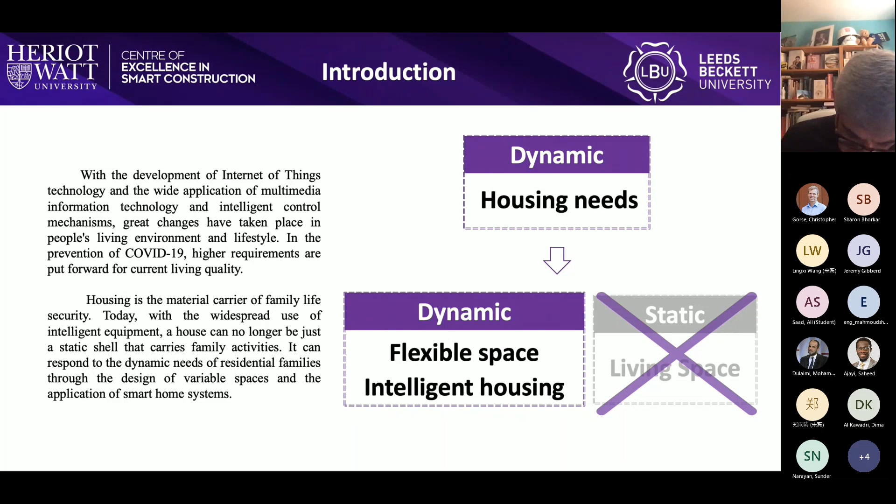With the development of Internet of Things technology, great changes have taken place in people's living environment, and higher requirements are put forward for current living quality. The house can no longer be just a static shell that carries family activities.

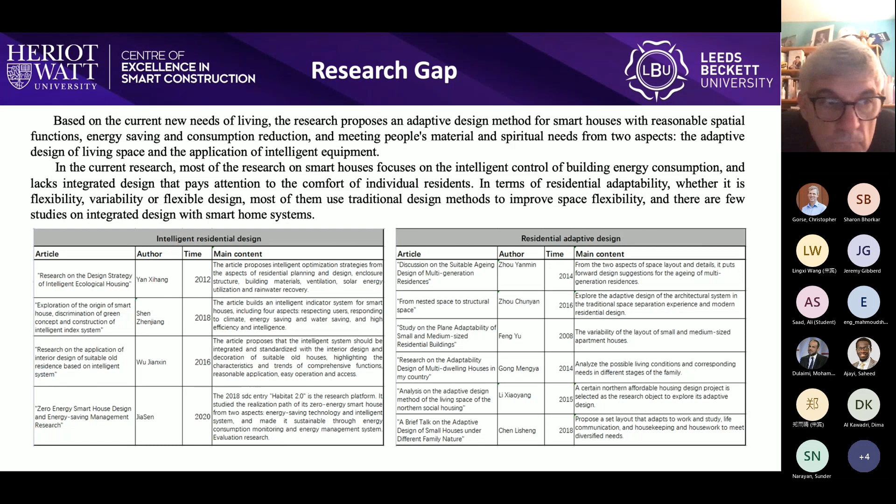In the existing research, there is a lack of research on the adaptive integrated design of smart houses that focuses on the needs of family living. This is the definition of smart house and residence adaptability used in this article.

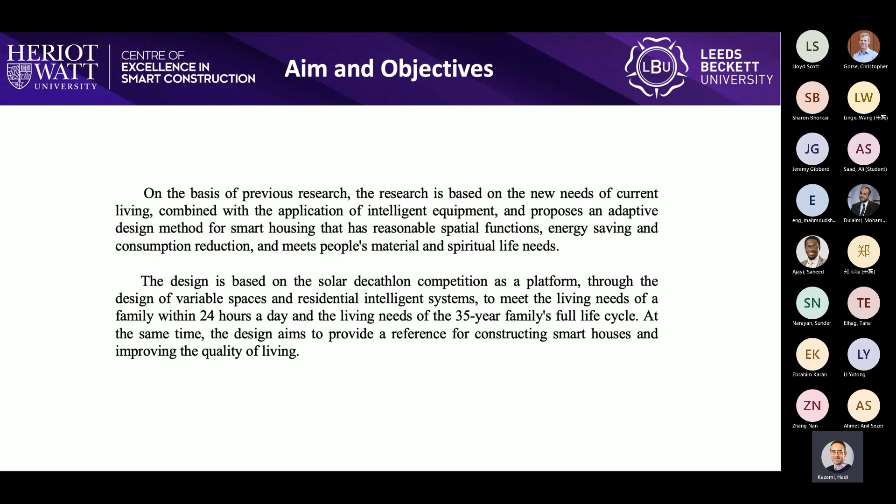I hope to propose adaptive design strategies for smart houses through research and provide a reference for improving the quality of living.

Based on the current social background, the research applies the methods of literature research, actual research, and product research to establish a correlation system among living space, living demand, and the smart home system. Then, through program design and practice, the study proposes the adaptive design strategy of smart houses from two aspects: space adaptive design and smart home scene setting.

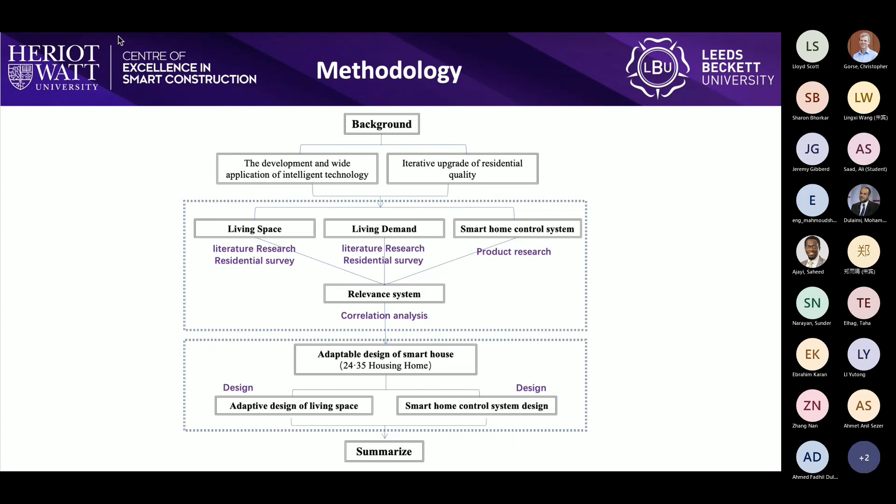The variable design of the living space can help cope with changes in the family's structure, and with the help of the smart home system, it can better meet current living needs.

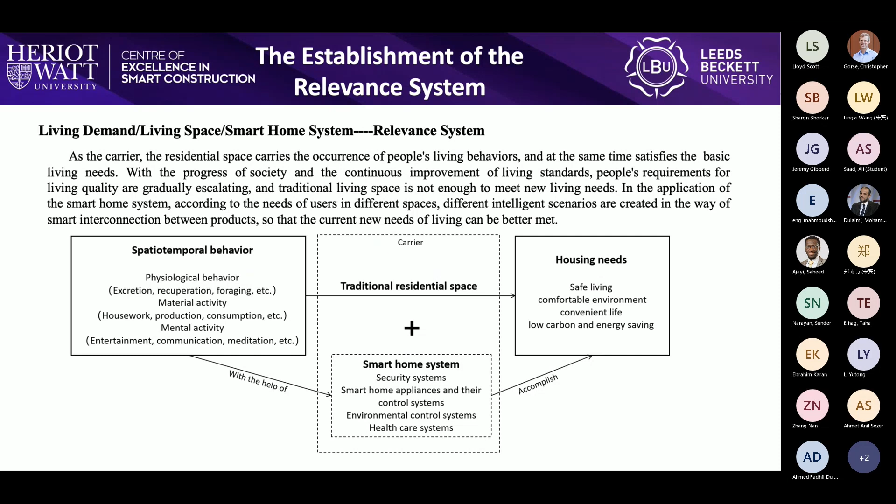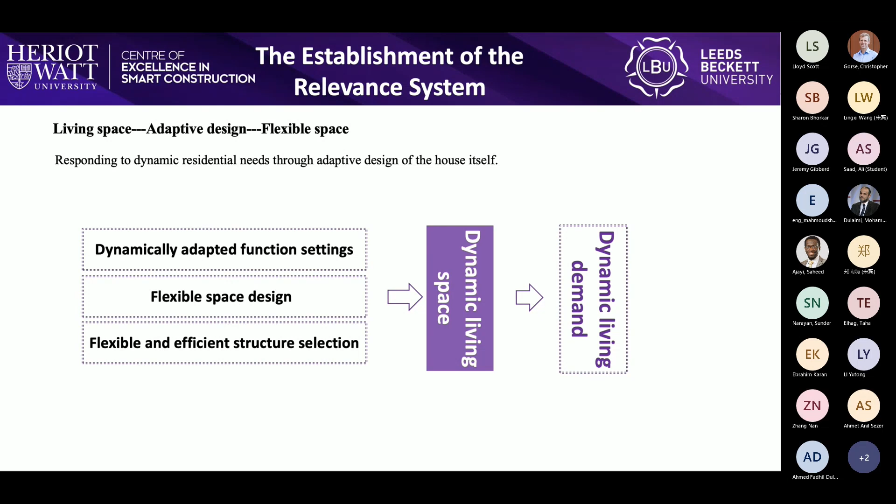Through research, the current smart home system can be divided into four categories: security system, smart home appliance and its control system, environmental control system, and health care system.

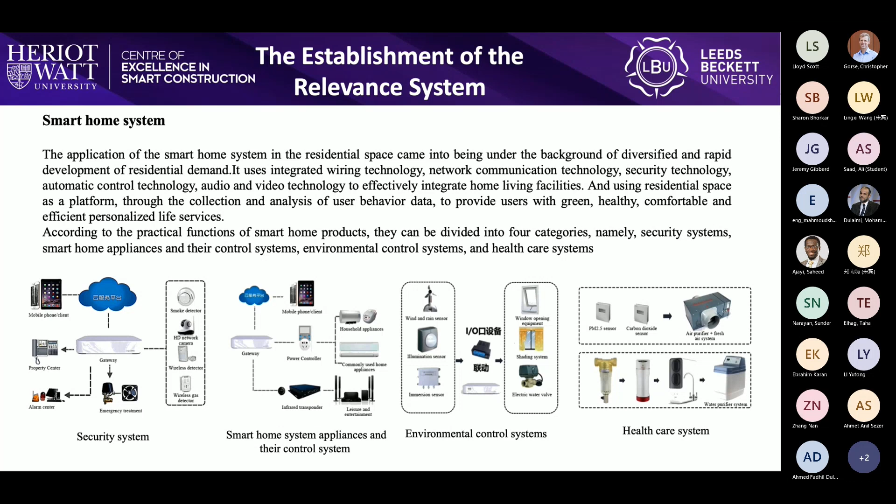The research simulates the residents' living behavior throughout the day and creates a smart life scenario. For example, the smart speaker wakes up the user on time in the morning and turns on the wake-up mode at the same time. A series of smart devices cooperate with people's 24-hour home life.

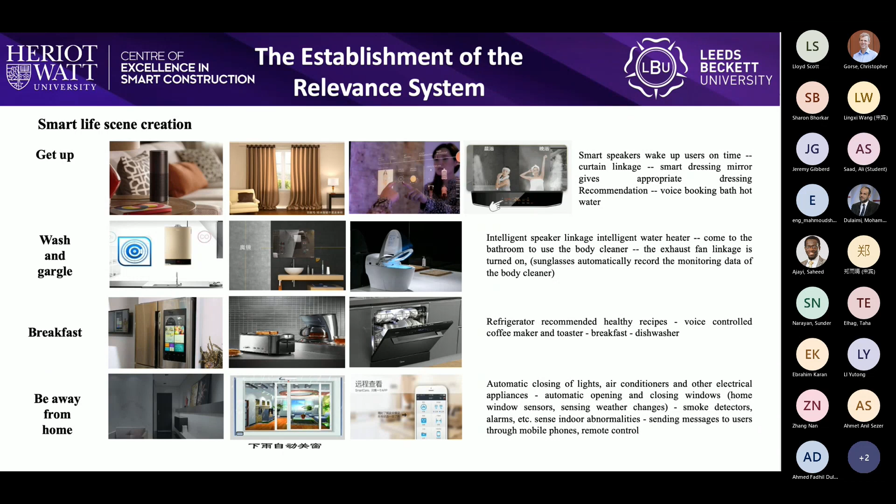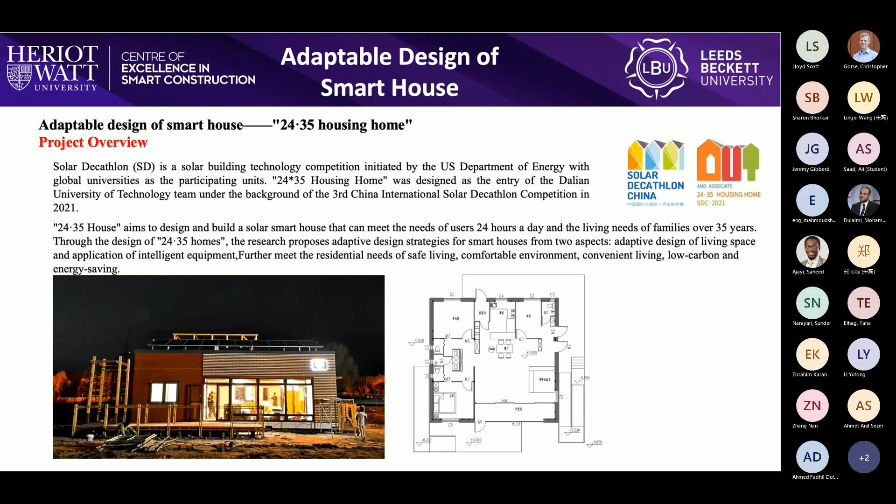The 24·35 housing home was designed and completed in the context of the third China International Solar Decathlon competition in 2021, which aims to design and build a solar smart house that can meet the needs of users 24 hours a day and the living needs of households with a life cycle of more than 35 years.

In response to dynamic residential needs, the plan responds from three aspects: dynamically adapted function settings, flexible space design, and flexible and efficient structure selection.

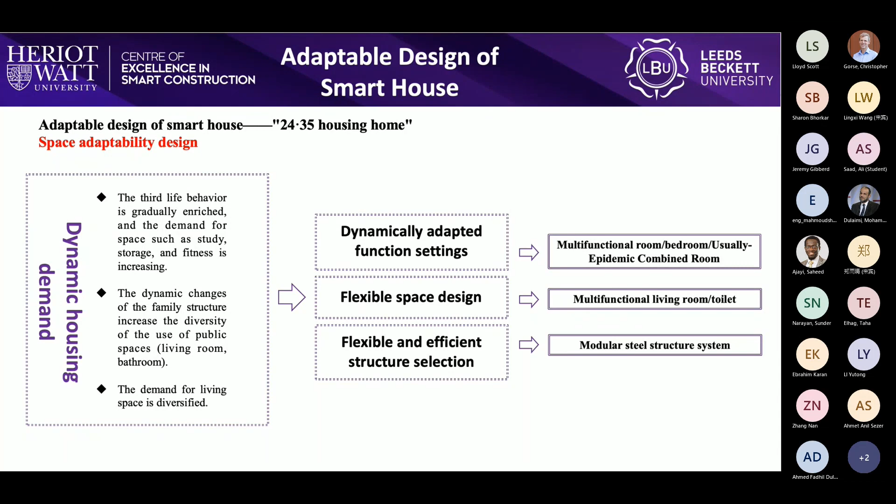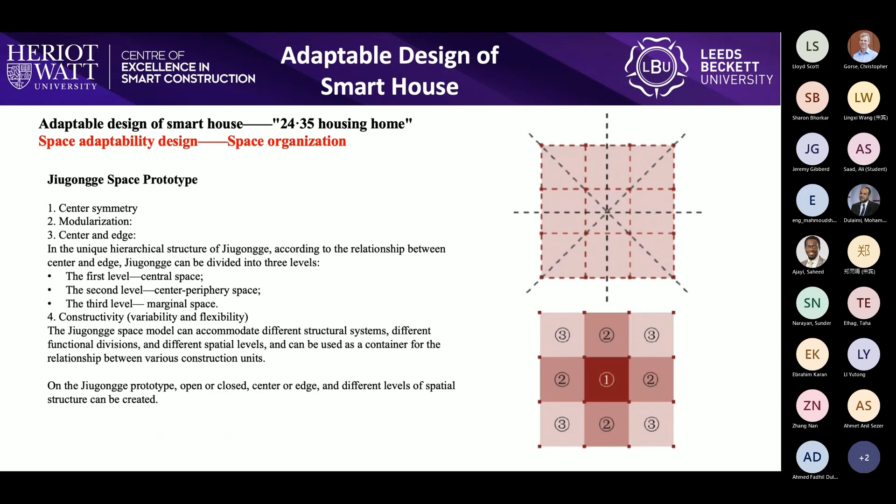First of all, in terms of space organization, the plan selects a highly adaptable nine-grid space prototype. In the design, the bedroom and the multifunctional room have the same scale and are arranged in mirror images, which can be flexibly changed and used according to changes in the family population.

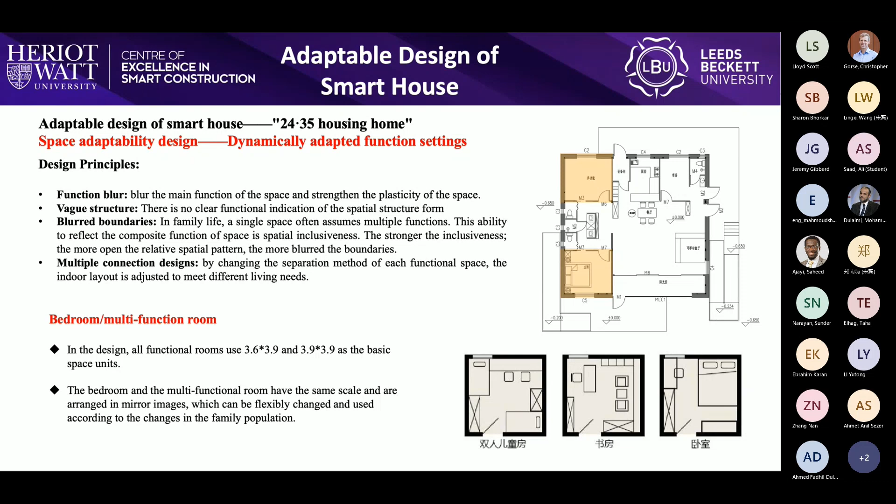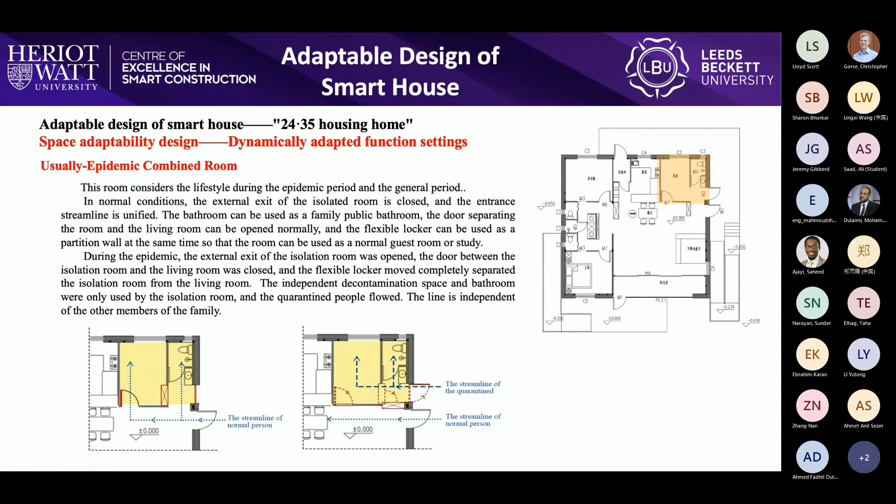With the help of flexible partition in the epidemic combined room, the lifestyle in both the epidemic period and the general period is considered. This is the design of flexible partition.

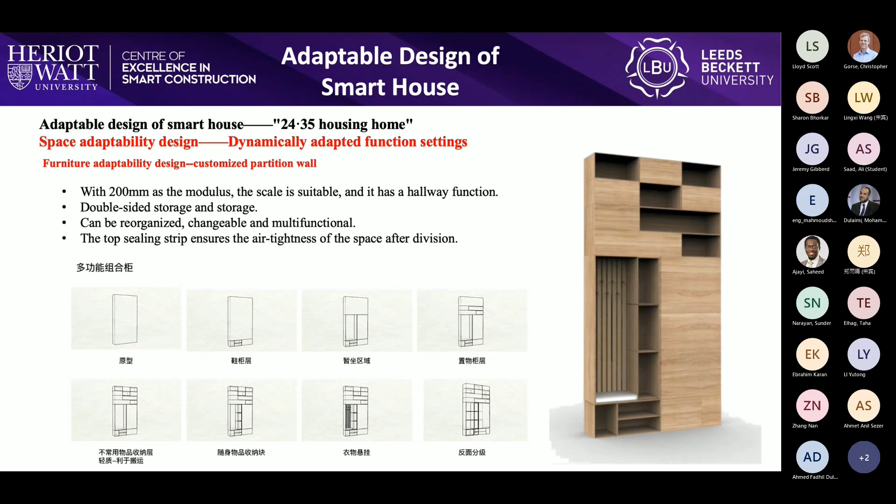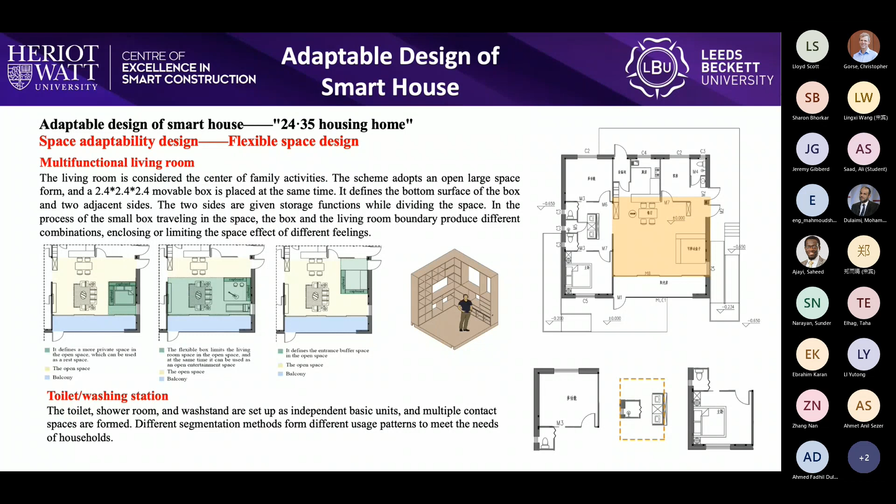The design uses a modular dual structure system.

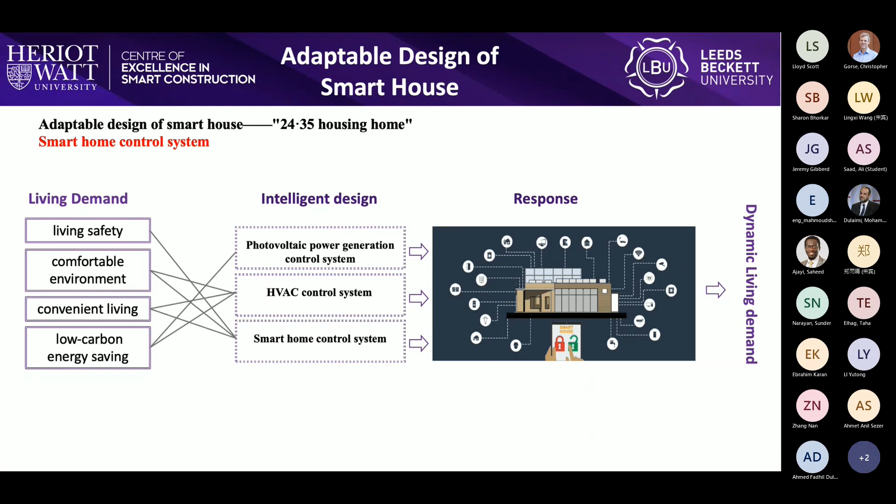In terms of smart home control system, the scheme has designed a photovoltaic power generation control system, an HVAC control system, and a smart home control system. This is a full part of the photovoltaic power generation system.

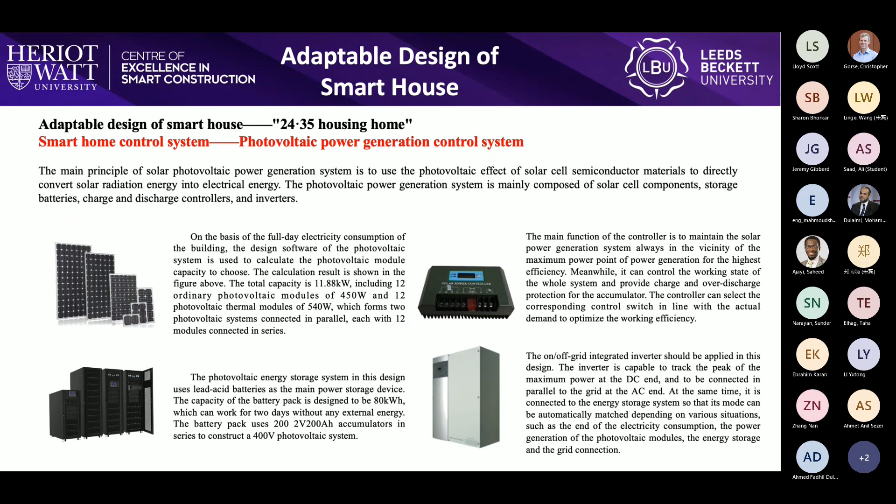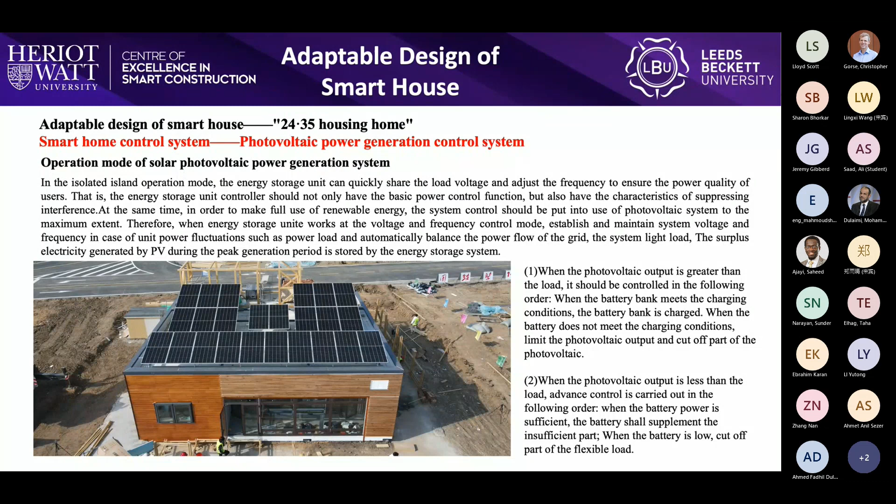Through the design of the system, the house puts the photovoltaic system into use to the maximum extent. The system automatically controls the electricity consumption of the house.

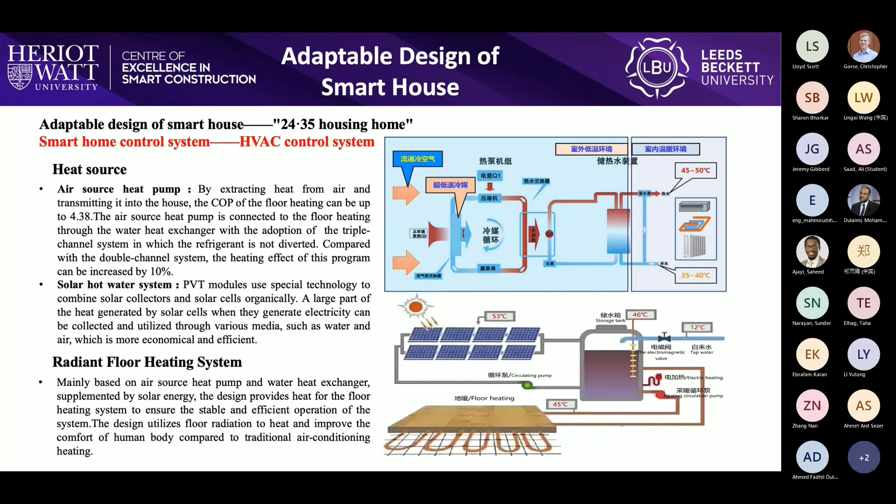In the HVAC control system, air and solar energy are used as heat sources to provide heat for the radiant floor heating system, which is economical and efficient, and at the same time improves comfort for the human body. The plan also applies an intelligently controlled air conditioning system and fresh air system.

The solution is based on the relevant system and creates smart life features such as smart sleep, smart access control, smart security, smart lighting, and so on.

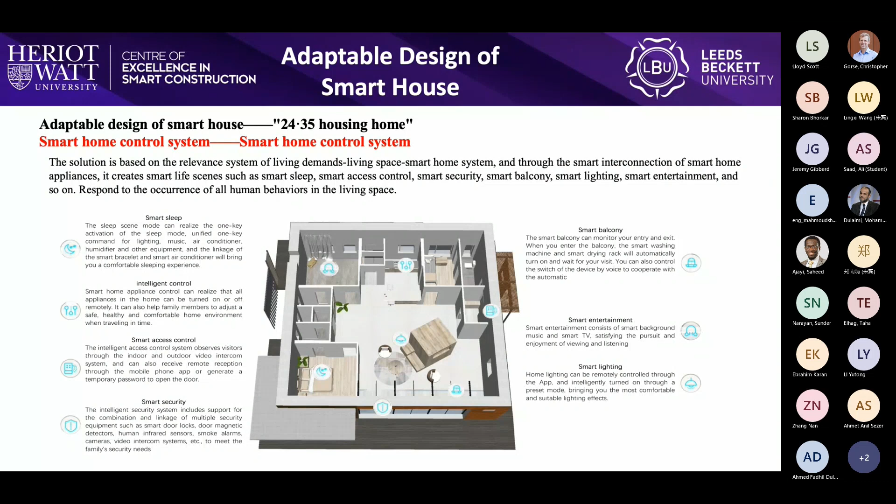The research analyzes the realization path of the adaptive design of smart house. The design improves adaptability of living space from the three aspects of structure, space, and function setting.

The application of the smart home control system ensures the safety of living and improves the convenience of life. The application of HVAC control system realizes environmental control centered on user comfort. The application of the photovoltaic power generation control system has realized low carbon and energy-saving residential needs.

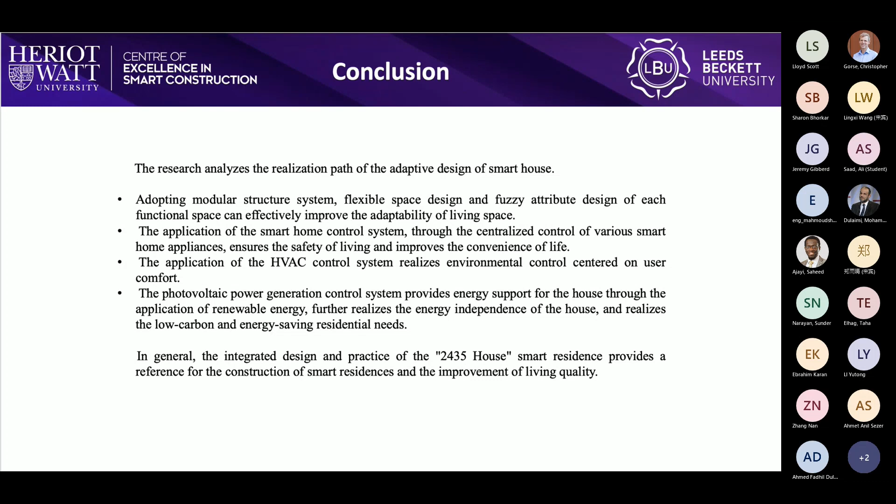In general, the integrated design and practice of the 2435 house provides a reference for the construction of smart home and the improvement of living quality. I hope you enjoy my speech and thank you for your listening.

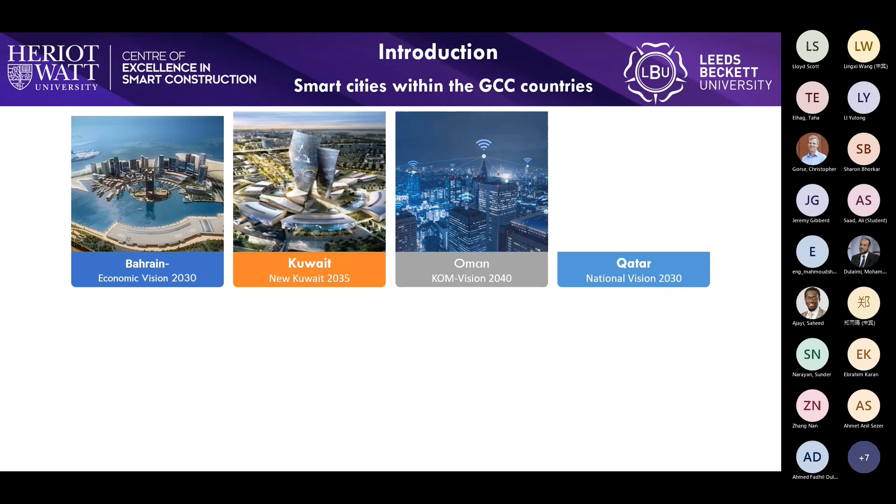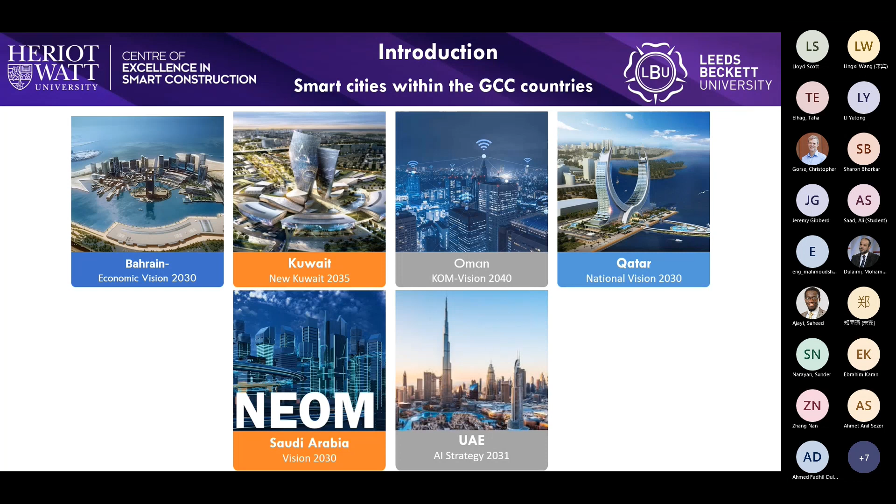I think the sound has gone again, Hadi. I can't hear either, no. Hadi, can you maybe unmute yourself, Hadi? Maybe it's coming through your microphone. Hadi, have you had a chance to look at it? My apologies, I'll just do it again then. If that persists, I can share my screen. Hadi.

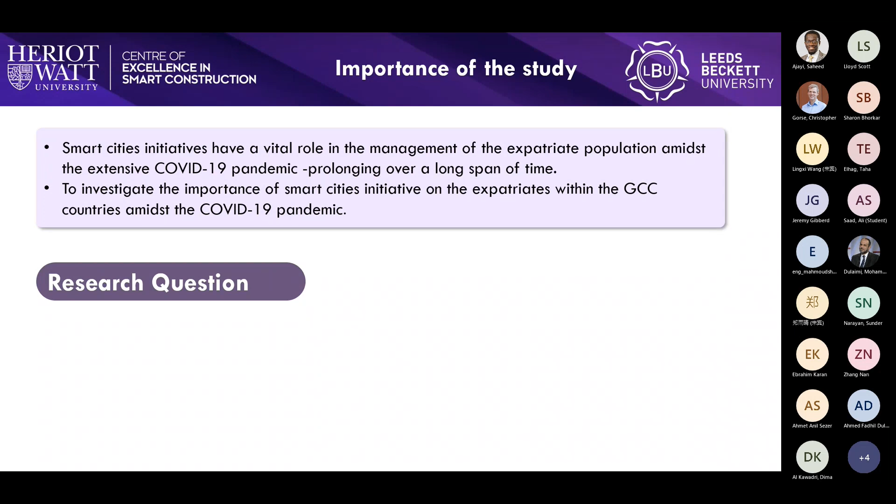...19 pandemic. However, research has been slow in investigating the impact of smart city initiatives on expatriates within the GCC. Our research paper addresses several questions related to the challenges, the drivers, and the effects of COVID-19 on expatriates with respect to smart cities initiatives within the GCC countries.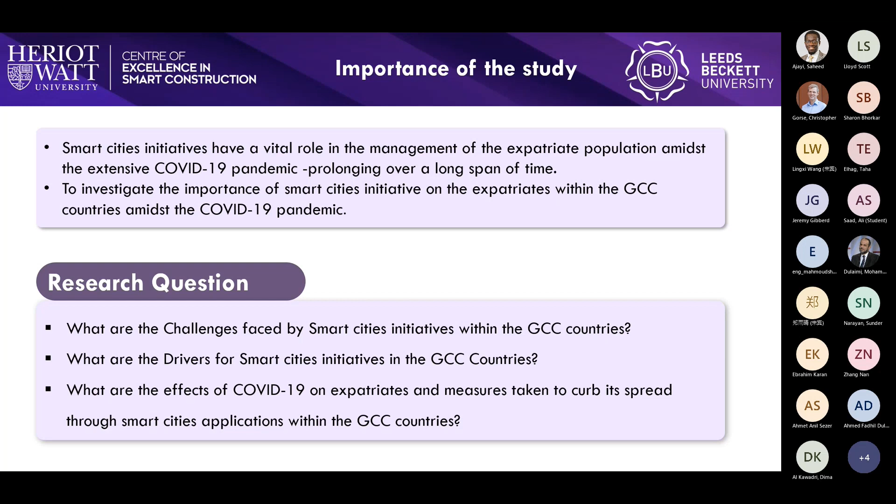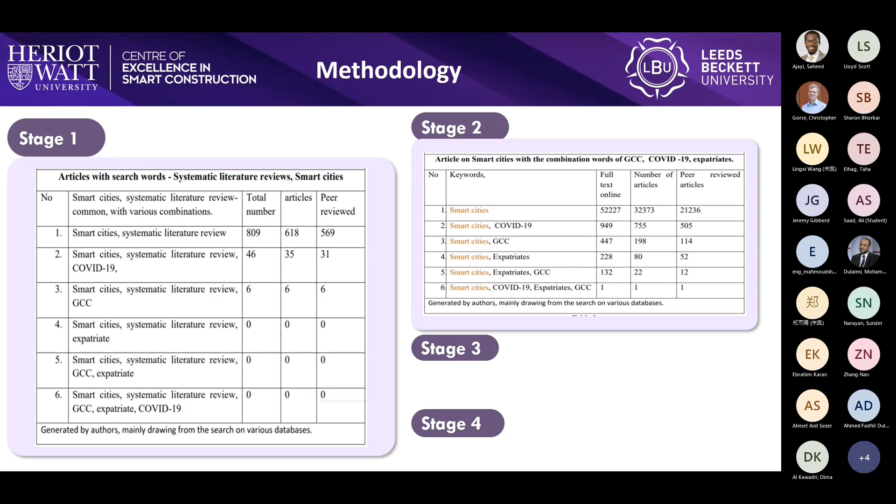This has jumped slides. At the start of our research, we searched for smart cities, and as we expected, there was plenty of literature. Even when we looked for smart cities within GCC countries, we found a good number of papers. However, when we looked at research considering expatriates in smart cities in GCC, we couldn't find any papers, and that gave us the motive to start looking into this as a gap.

Therefore, we started our research by looking at smart cities initiatives within a wider context, as well as within the GCC countries, to identify constructs which we then analyzed and evaluated, linking it to the expatriate population and the COVID-19 situation.

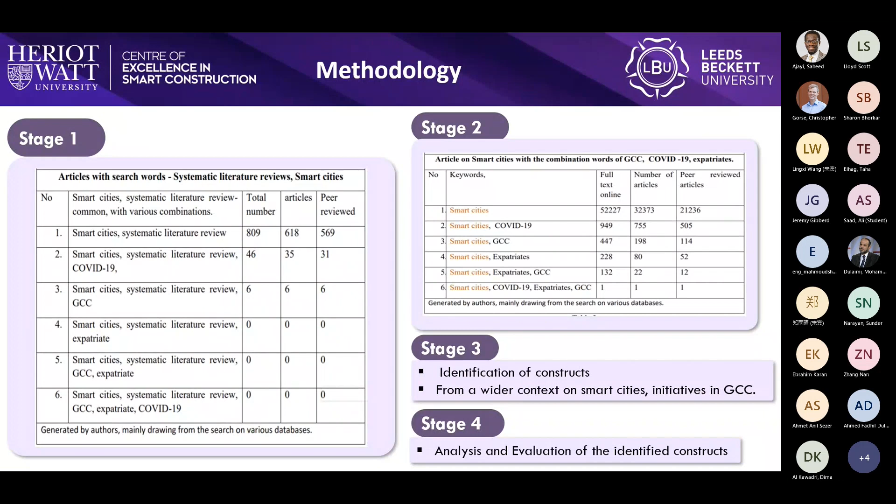Hence, the systematic literature review followed a methodical framework, beginning with a search of relevant literature across numerous databases, web engines, and subscriptions. These were compiled using the PRISMA flow diagram. The constructs identified from the wider relevant literature with the main criteria of smart cities initiatives were mapped and analyzed methodically with respect to the context of GCC countries. We will now discuss the three main identified constructs: challenges, drivers, and the impact of COVID-19 within the GCC.

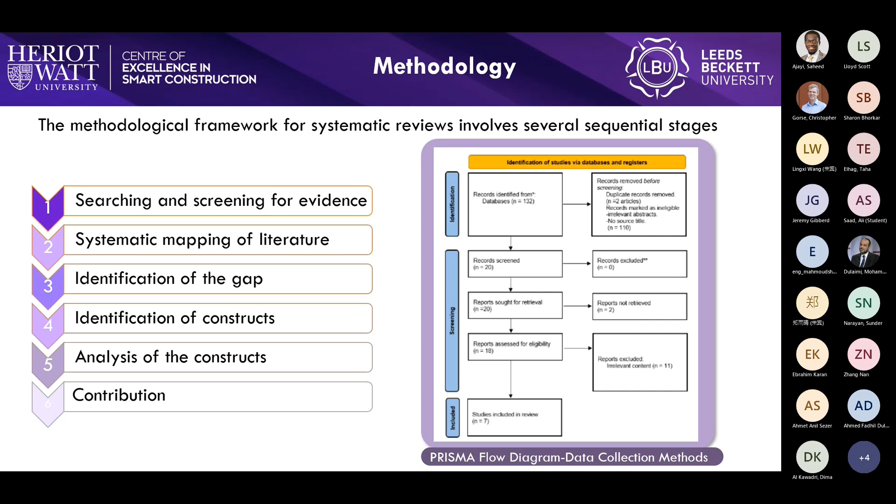On investigating challenges faced in the development of smart city initiatives within the GCC, we mapped the relevant points under themes such as governance, ecological factors, societal and technological challenges. Further, each of these themes was subdivided into factors.

The main themes for the construct of drivers with respect to smart city initiatives in the GCC were economic growth, a potential for renewable energy, and diminishing reserves.

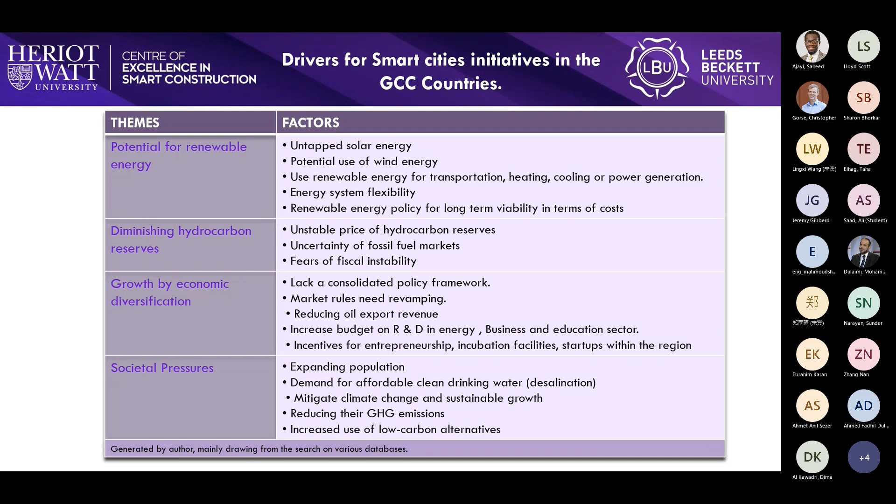The impact of COVID-19 within the GCC was a significant construct. This study covered the effects of COVID-19 on the economy and the subsequent effects on the expatriate population, as well as the measures to curb the spread of this pandemic.

This systematic literature review draws attention to the fact that research on smart cities initiatives within the GCC countries is fragmented in its approach and lacks a holistic viewpoint of the entire GCC region. The study draws attention to the significant gap in research, which is the impact of smart cities initiatives on expatriates within the GCC countries.

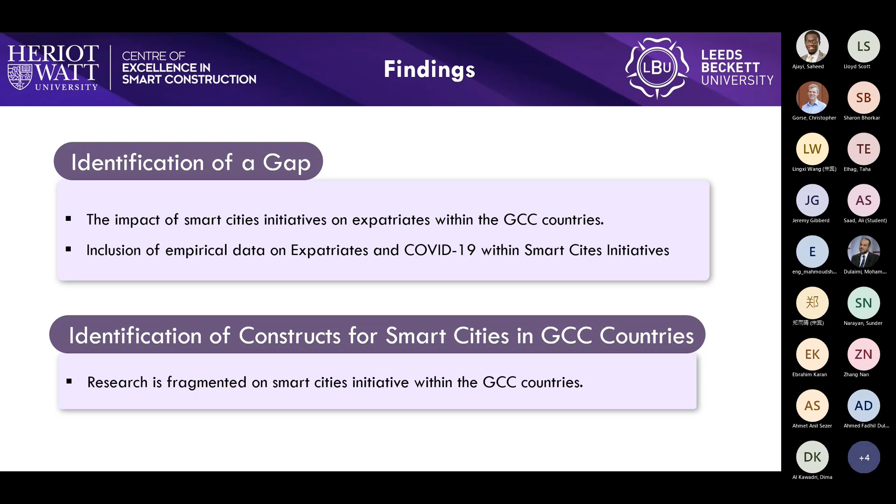It is evident from the constructs that expatriates play a significant role in the economy and development of GCC countries. The smart city initiatives have a considerable impact on expatriates. The systematic literature review we have presented aims to justify the gaps and provide a roadmap for research that is required to address this gap. There is a need to research the impact of smart city initiatives on expatriates in GCC countries, as well as to identify these with respect to pandemics such as the COVID-19 situation.

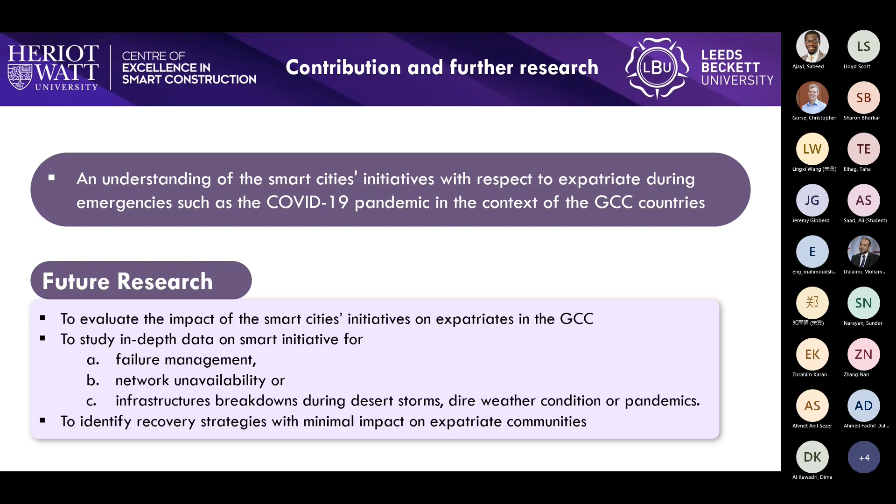Okay, thank you, Sharon. Have we any comments that people would like to make? It was a very interesting topic, and I think it's very interesting that you've narrowed it down to looking at the expatriates element of it. I suppose my question is, what evidence in terms of numbers of expatriates in the region did you identify?

Can I answer the question? Yeah, absolutely, Sharon, it's over to you. I'm so sorry that you missed out on the introduction - I really apologize for that. That would have given an overview of what the GCC countries are. But okay, yes.

Can you please repeat your question again? So I suppose we missed out on the overview, and I'm wondering, what are the communities of expats, and what sort of numbers are we talking about, and did your literature review uncover that information or knowledge?

The expatriate population within the GCC countries is very high. In the UAE itself, it is about 92%. It's somewhat lower in Oman and in Saudi Arabia - I would say it ranges from around 75% to about 92%, highest of course in the UAE. So we're looking at a large population of mobile, expatriate people, which is a very vulnerable human capital pool for MNCs in these countries, and they're responsible for having built this region.

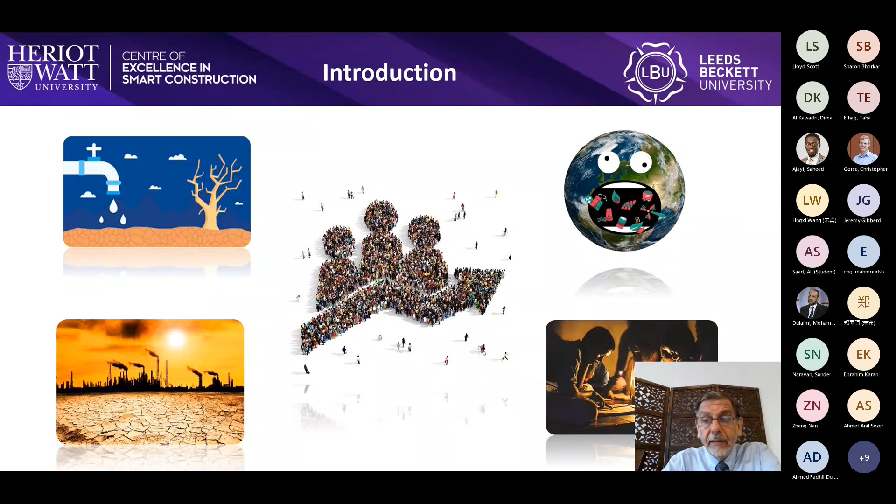These challenges appear in different fields: energy supply, exchange, and consumption. The energy scarcity is due to population expansion, growing demand for energy, natural resource shortages, global warming, and other environmental concerns. Furthermore, scarcity of energy requires growth of renewable energies and improved energy efficiency. It is considered a top priority for all governments and organizations to resolve this problem.

Nowadays, the development of new technologies and IoT lead to realizing the benefit of having an integrated energy management system that combines all types of energy consumption. This brings attention to creating sustainable smart cities. Many countries are now combining customized services and businesses within energy infrastructure and urban environments to build sustainable smart energy cities. To build such a city requires a suitable tool to manage all these components, all types of energy consumption.

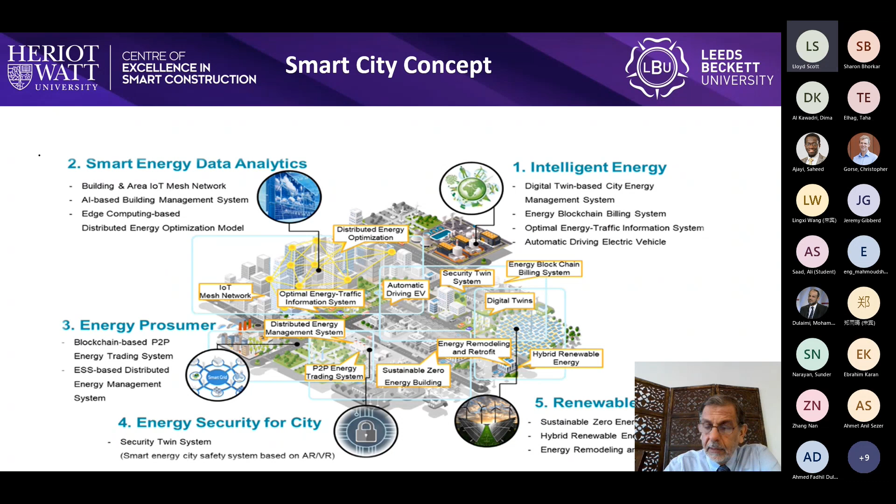Energy Hub is a promising solution to integrate all energy management systems. Energy Hub can provide benefits to all citizens, such as convenience, safety, cost saving, and reducing carbon footprint. Smart Energy Hub uses advanced applications, communications, digital information, and automated monitoring technologies to optimize and improve the operation of the energy network.

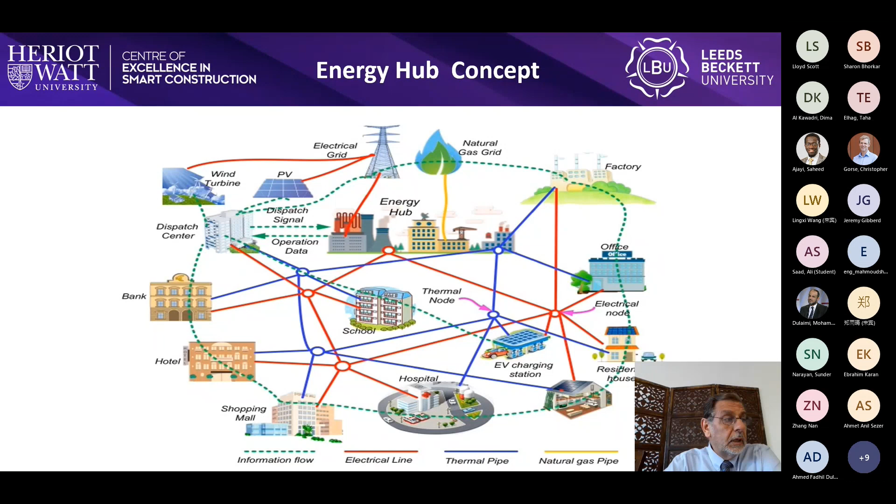Energy Hub can be divided into two types: macro hub and micro hub. It depends on the control and patterns of consumption, or the objective of consumers.

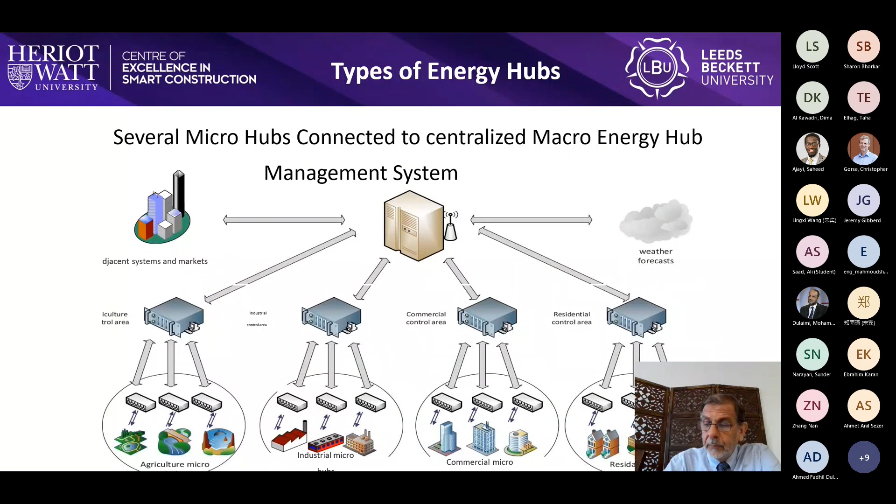A smart city is a city that uses several sorts of sensors to capture electronic data and provide information that is then used to manage assets and resources efficiently. This data is about citizens, devices, and assets. It's processed and analyzed to enable traffic and transportation systems, power plants, water supply networks, waste management, information systems, schools, libraries, hospitals, and other community services. All these are to be monitored and managed on one unit.

One of the pioneers in developing Energy Hub is Enova by Veolia. They were able to develop an Energy Hub called Hub Grade 4 that manages energy consumption and material flow for their clients. Hub Grade 4 provides an innovative approach to successfully implement energy efficiency improvements using artificial intelligence and real-time data. It depends on connected sensors and products. Enova by Veolia is a regional leader in integrated energy and facilities management.

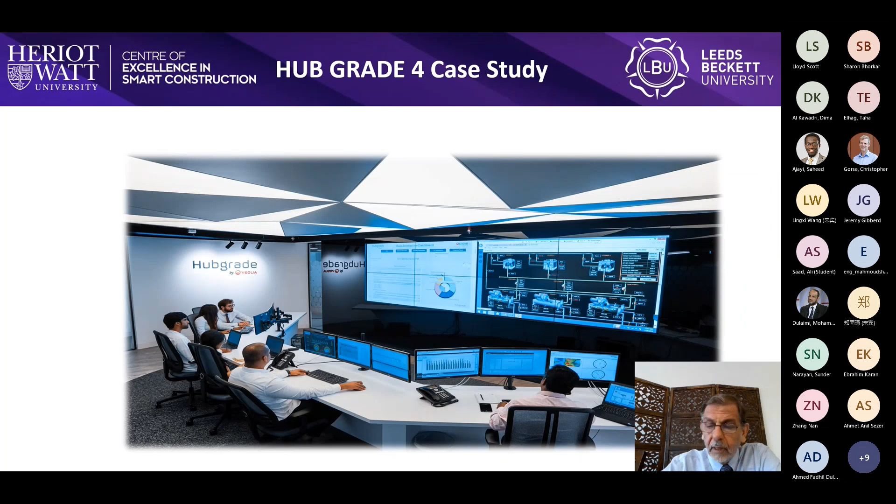In our case study, in Hub Grade 4, the sustainable report for the last 3 years for the projects and clients under and managed by Hub Grade 4 shows saving around 253 million kilowatt-hours of electricity, 3 million cubic meters, and around 138 million dirham saving.

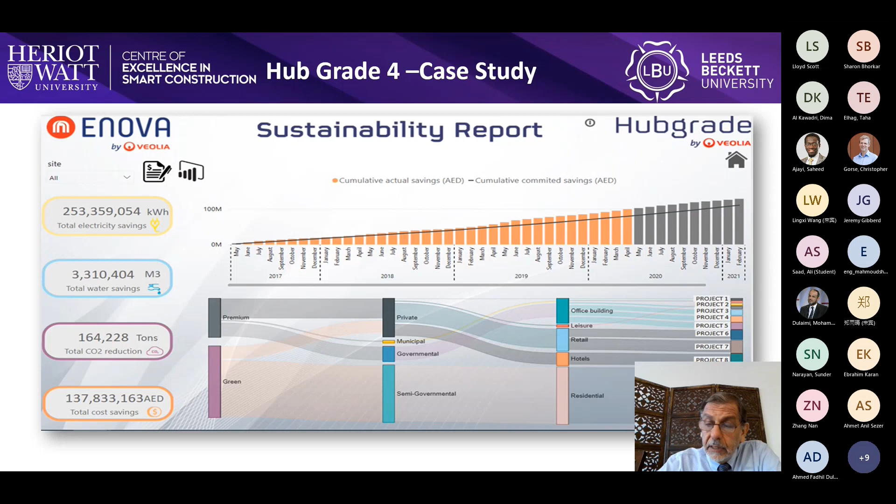As a summary of this study, the case study reveals that the impact of increased population on Earth requires a huge effort to optimize consumption of natural resources. The optimal use of these resources requires a centralized monitoring system and integrated energy management that can optimize and reuse energy consumption and save the Earth's resources.

Introducing the energy hub as a concept provides a powerful tool to manage energy flow and energy consumption in real time using new technologies and IoT. Since this energy hub has the ability to integrate several services for different types of facilities, an energy hub is an excellent solution to optimize energy consumption and save Earth's resources, leading to an integrated energy management system.

As for future plans, this requires intervention of government to play a significant role to form new policies, new technology, new regulations to incentivize and promote sustainable smart cities, and enforce the construction of smart energy hubs as a part of the infrastructure of the city, and encourage building owners to adopt micro hubs as a part of the construction model for their properties.

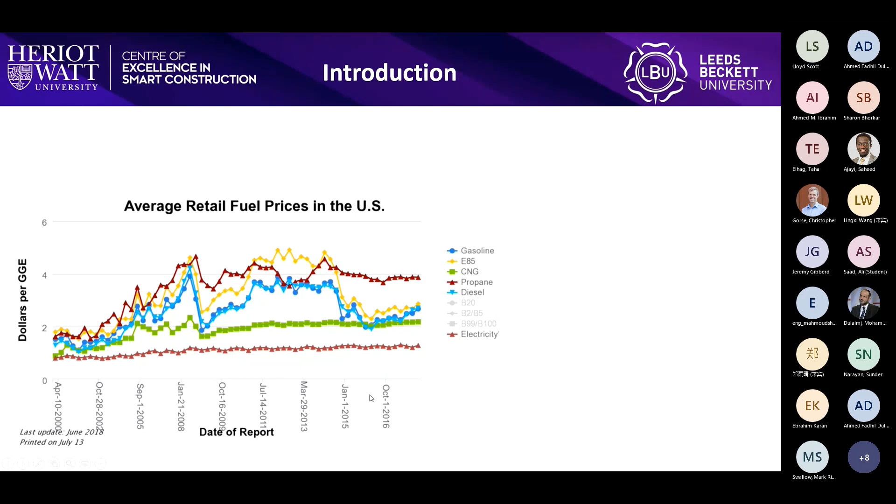I can share a simple calculation. I'm driving a Chevy Cruze with fuel efficiency around 30 miles per gallon. At a fuel price of around $3, which is about what it is as I'm recording this, I'm paying around $6 for driving 60 miles or 100 kilometers. Let's compare that with a similarly priced car, but an EV.

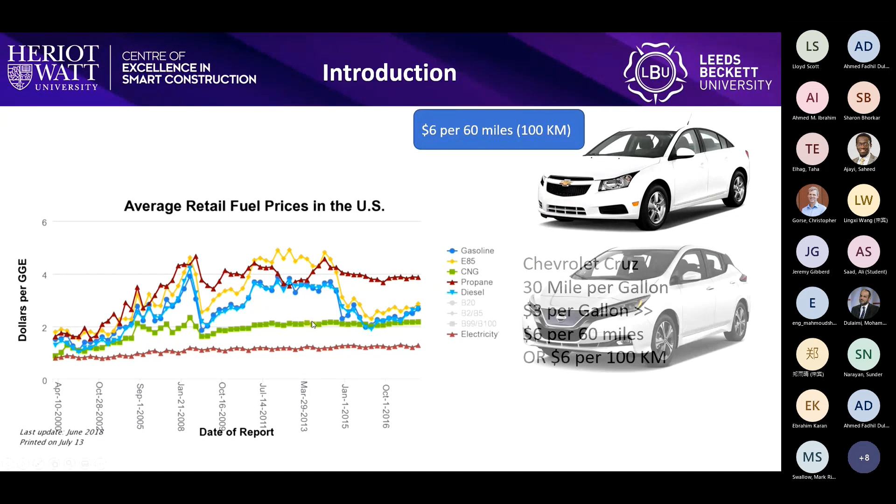I'll pick the Nissan Leaf. Its efficiency is 0.3 kilowatt-hour per mile, and the rate I'm paying for electricity is around 12 cents per kilowatt-hour. Altogether, if I drove an EV, it would cost me only $2.16 for that same 100 kilometers or 60 miles — almost less than half the cost of transportation.

So especially because of the economic aspect of EVs and electric vehicles in general, we expect to see a boom in the usage of this technology.

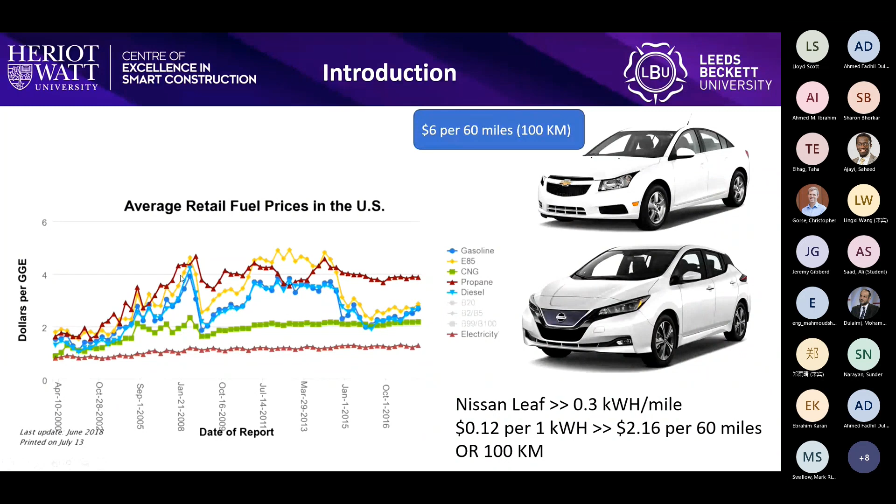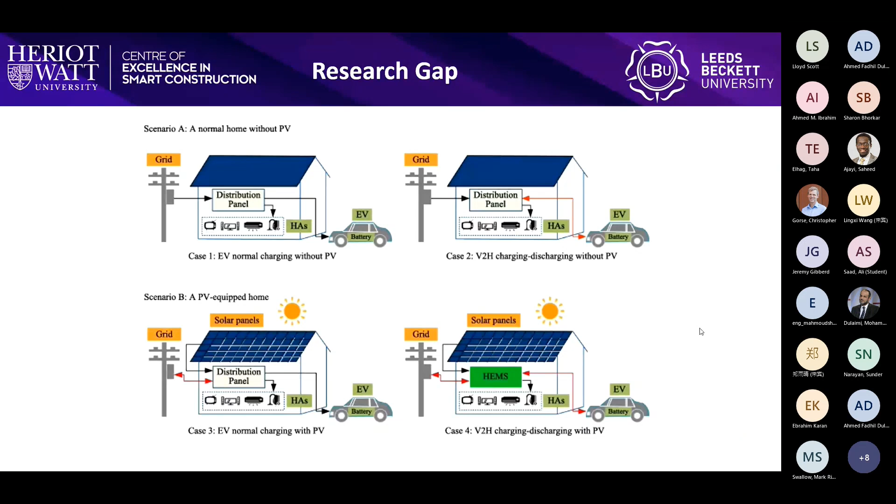All EVs have a battery, but we don't drive them all the time. Therefore, we can use the energy stored in the vehicle, and when we need it, send it back to the grid. That's what we call vehicle-to-home — a concept that enables EV batteries to associate with homes. Any vehicle that can be connected to an electric plug can be used for this technology. The point is to better transfer and distribute electricity between our home and our vehicle.

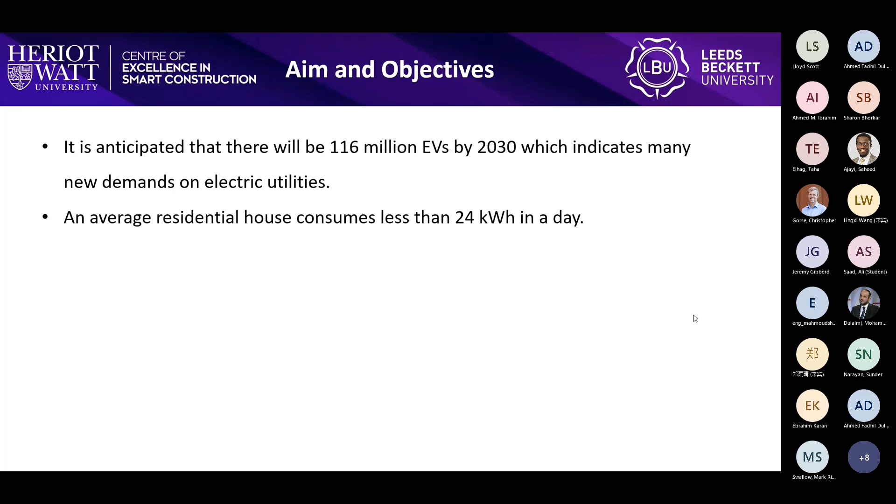Our expectation is to see more and more electric vehicles, which will increase demand for electric utilities, but also gives us an opportunity to use them. On average, a residential house in the US needs around 24 kilowatt-hours a day. Looking at battery capacity, which is 45 kilowatt-hours, if I run out of electricity but have a fully charged EV, I can plug it in and use the stored energy for almost 2 days.

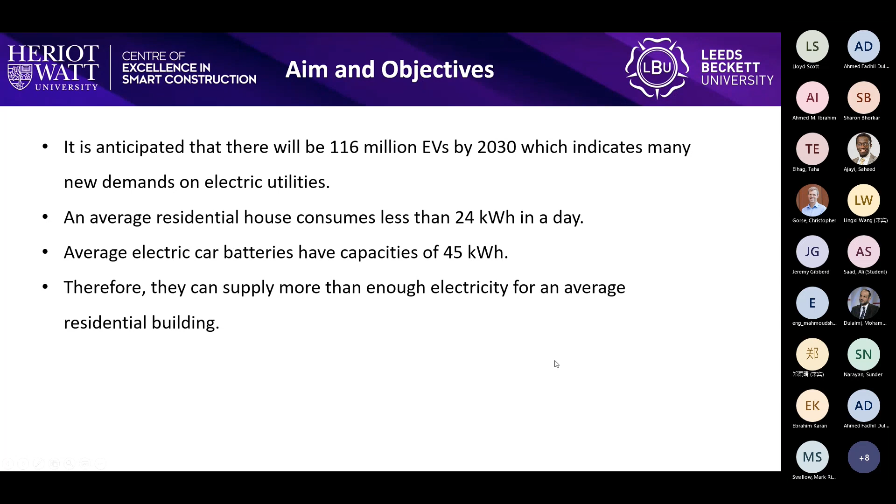It's also possible to save electricity, especially during power outages, and make more of the time you have. So the point is, this is a good opportunity — let's see how much we can use that capacity of EVs and how much profit we can make, especially if we put everything in dollar amounts. The comparison would be much easier.

So we made an energy model for this, to see what would be the best way to distribute the energy. First, if we generate energy from our solar system, would it be better to store it in our car, send it to the grid, or use it in the home?

Not to mention, there are situations that would also impact our decision. First of all, your electric vehicle should be available at home, otherwise there's no way to store the electricity in your car. Not to mention, if the demand of your house is lower than the amount you're going to produce, and there's no battery installed because you don't have your car in your garage, the electricity will be sent back to the grid.

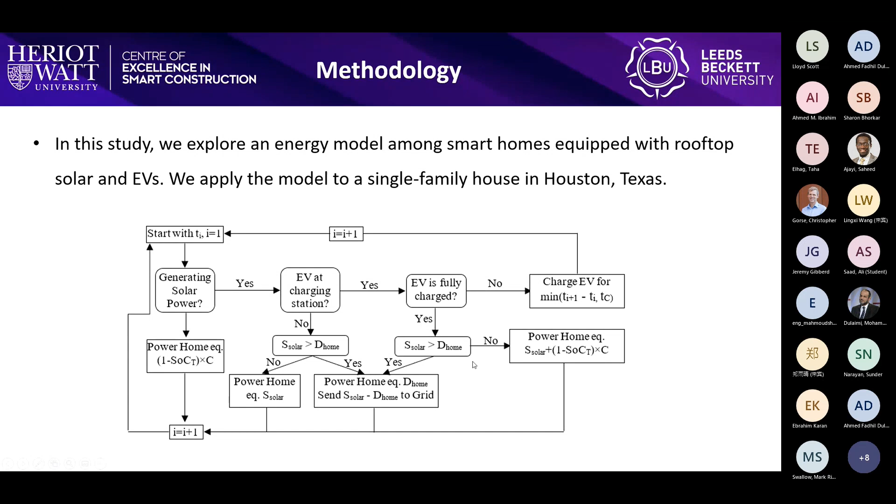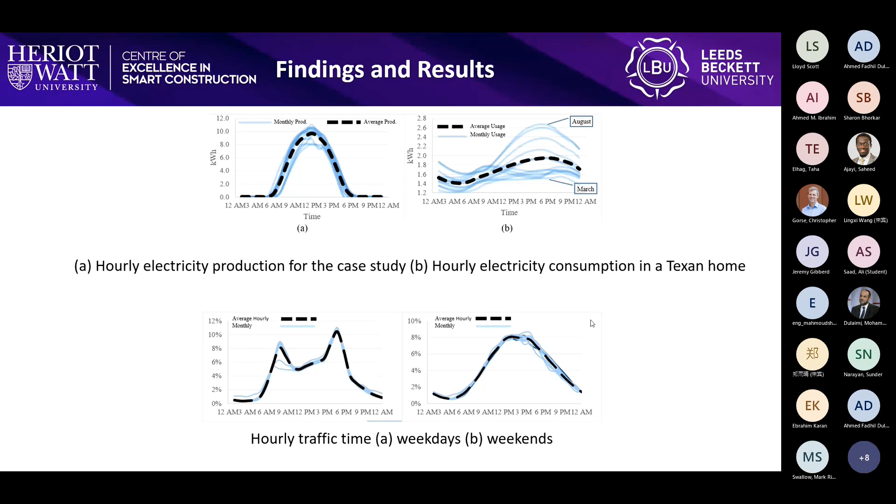Having said this, we came to some conclusions. For example, the best thing to do is to make sure our EV is charged during peak times. In some months we need more power, in others we're in a less favorable situation, but overall the demand for the house also plays a major role. I'm trying to finish this in 8 minutes, but I'm hoping you can review the paper for more details.

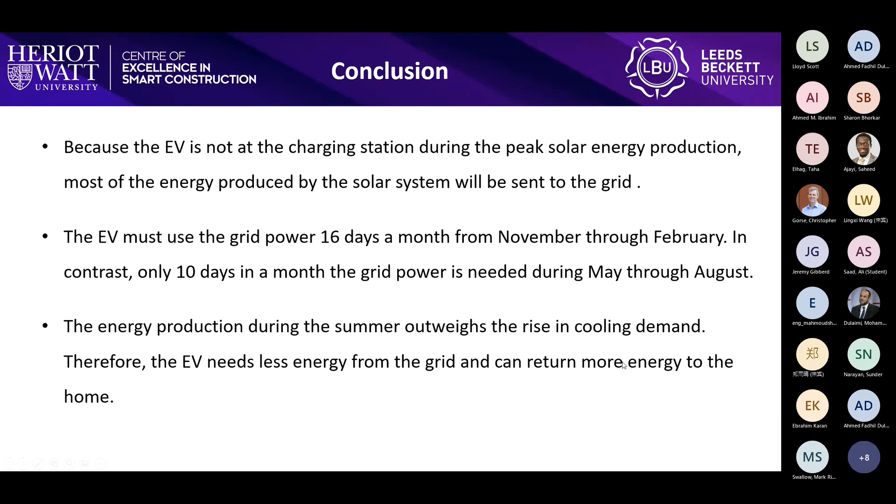Great, thank you Abraham, and I'm glad you've joined us here. Has anyone any questions? It's a really interesting project, and I liked the way at the start you drew the comparison in terms of vehicle use, traditional vehicles versus EV vehicles.

Anyone like to raise a question for Abraham? People are conscious it's coming up to lunchtime. Oh, Chris, you have a question?

Yeah, I thought that was a really useful presentation, Abraham. I'm interested—so you really just offered a comparison to the heating and conditioning cycles. I'm wondering whether through the monitoring you've done, or through other projects, you've got some insight into how you might optimize the use and develop it into a more smart system where you can achieve greater savings and improve the conditioning of the space as well.

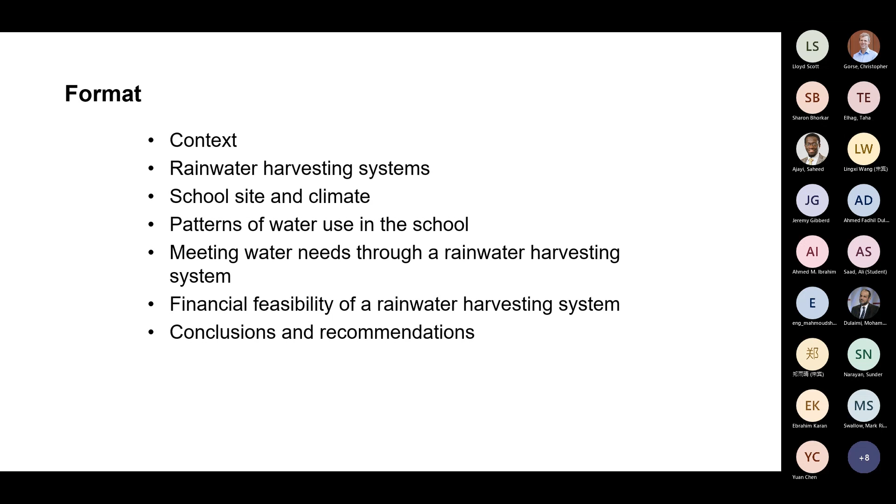In the case of South Africa, we have a situation where many schools experience water shortages, and the supplies are increasingly unreliable. The cost of water goes up as municipalities try and restrict consumption, and this sometimes results in schools having to close. There's a huge negative impact as learners don't go to school, and there's huge disruption in terms of curriculum.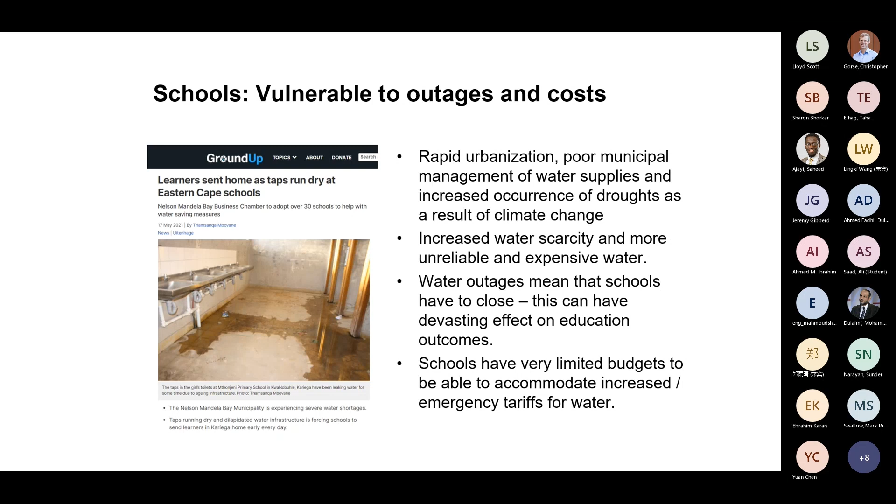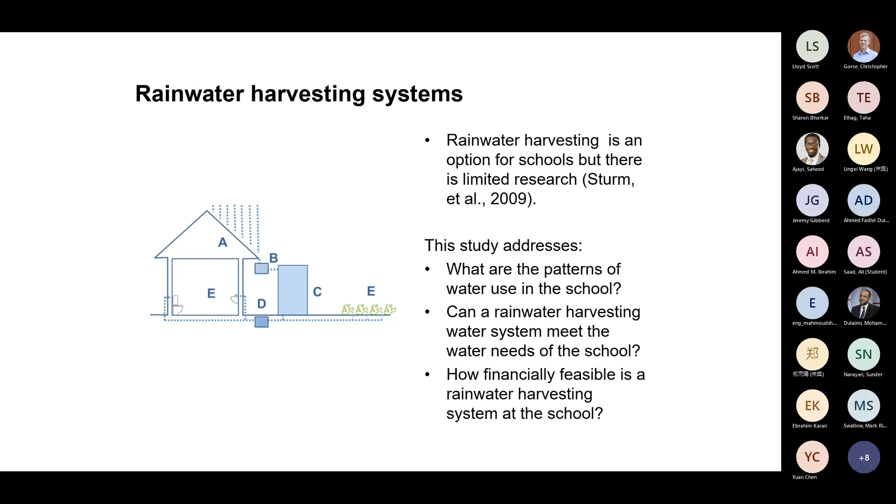So one option is to look at rainwater harvesting, but there's very little research on this. So this particular study looks at patterns of water use in schools. Can they be met from rainwater harvesting systems? And then what's the financial feasibility of that?

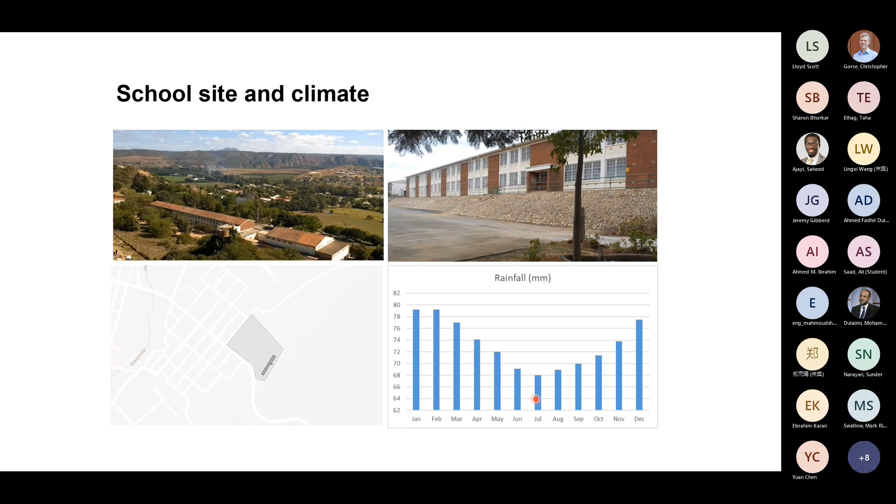So the first thing we did was to look at water use at schools using conventional equipment, and what we did was really look at consumption in terms of toilets, also in terms of things like drinking water, cleaning water. And basically we came to a figure of about 134,000 litres in terms of monthly usage.

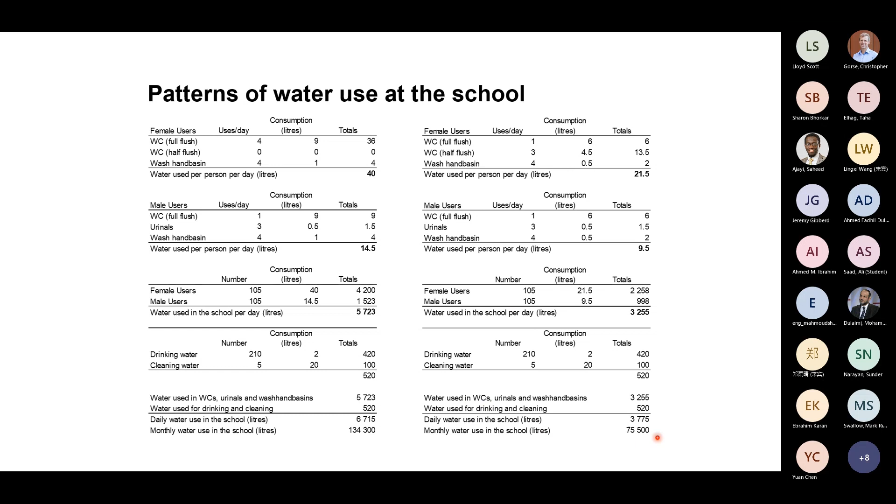If you fit much more efficient fittings, so low water use toilets, aerators on taps, and you basically run the school much more efficiently, it's quite feasible to get that down to about half, so to about 75,000 litres per month.

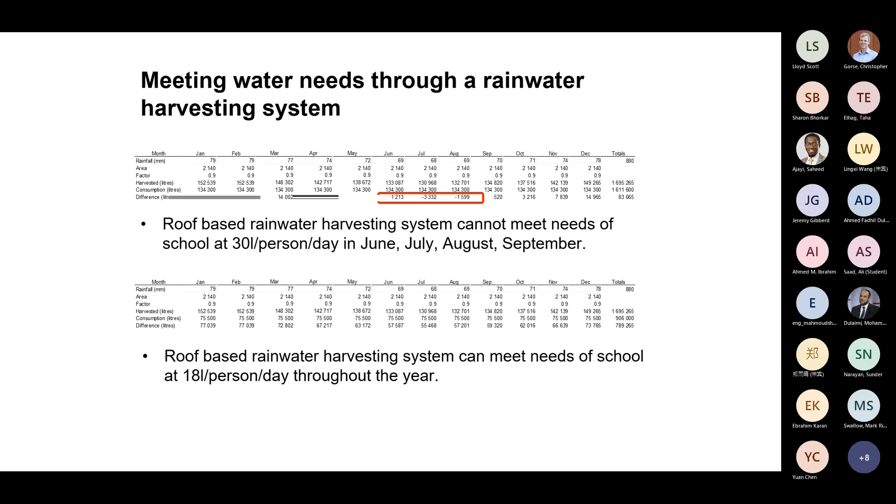So moving on to the financial feasibility, the fortunate thing here is there's very large roof areas, so the cost really is linked to tanks, bases, plumbing, some filtration for drinking water. You get a capital cost of about 300,000 Rand - Rand is about 20 Rand to the pound if you're using British pounds. We can do a very simple calculation to look at savings per year, and that gives you a payback period of about 21 years. So not particularly good in terms of payback period.

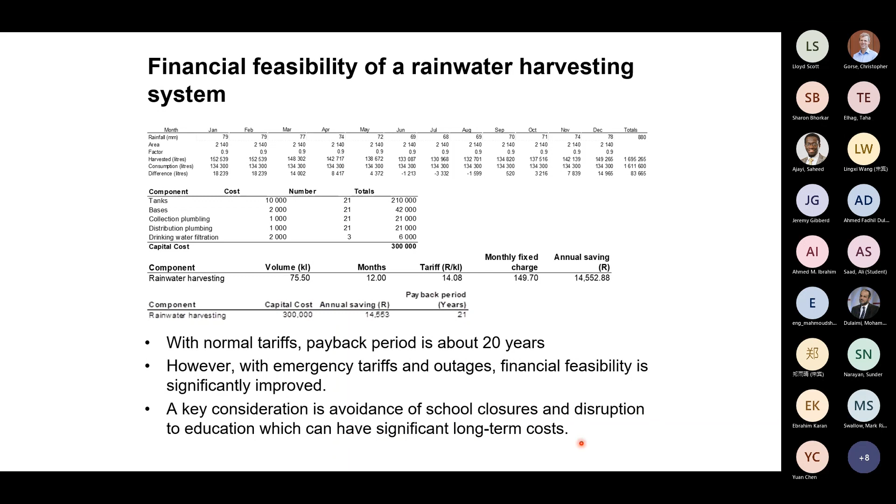But what's important here is to understand that schools using this system would avoid school closures and disruption, and that has obviously a major beneficial impact.

So to finish off on some conclusions, the first thing is to understand that it's very important to have an efficient system at schools. The inefficient system couldn't be serviced just using rainwater harvesting, whereas when you took it down to about 18 litres per person, you could basically have an off-grid system. The third thing is to see that payback periods, if there's a reliable local municipal supply, is about 20 years - so not a particularly strong payback period.

However, what's important here is to understand, obviously, that emergency tariffs double, triple, quadruple the normal tariffs. So very quickly, if you apply that to the school, that payback period drops radically to half, to 10 years or even 5 years. But much more important is the cost and disruption associated with closures and education disruption - and that's something that's very important.

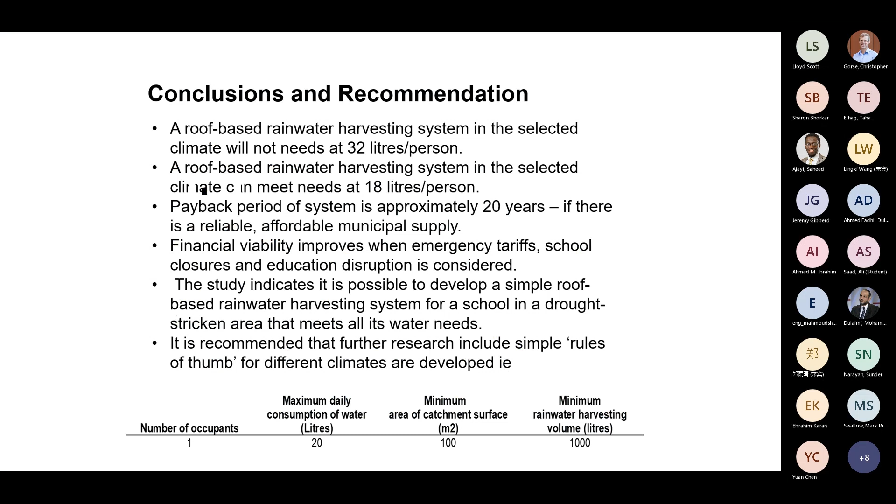And certainly a case study that can actually contribute to our knowledge and understanding of using net positive water systems for schools and the like, and to come at it not just from the financial spectrum, but also from what are the knock-on effects of implementing a system like that in terms of keeping the school open during periods of drought, etc. So thank you for sharing that study with us.